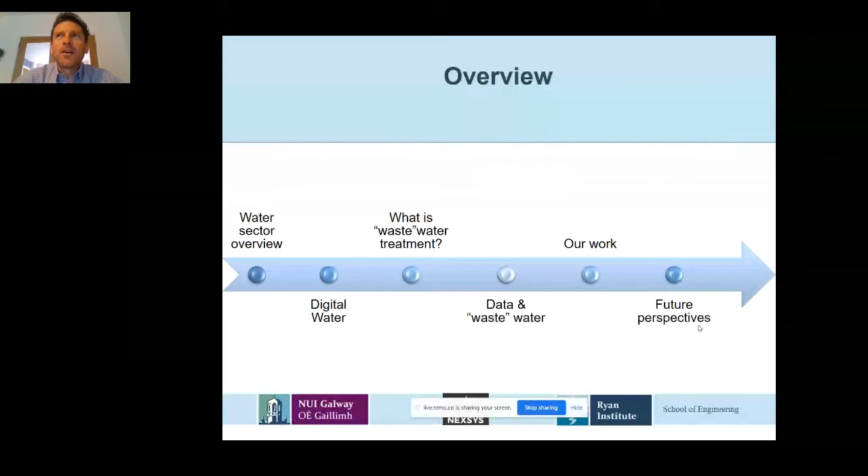I think there's a simple way of summarizing the role of the water sector: water, wastewater treatment, and sanitation. I've picked 3 graphs, and they list different types of infrastructure or services and their impact on life expectancy. One is the impact of health expenditure on life expectancy, and as you'd expect, in general there's a correlation—the more you spend on health, the longer your life expectancy in different countries, up to a certain point.

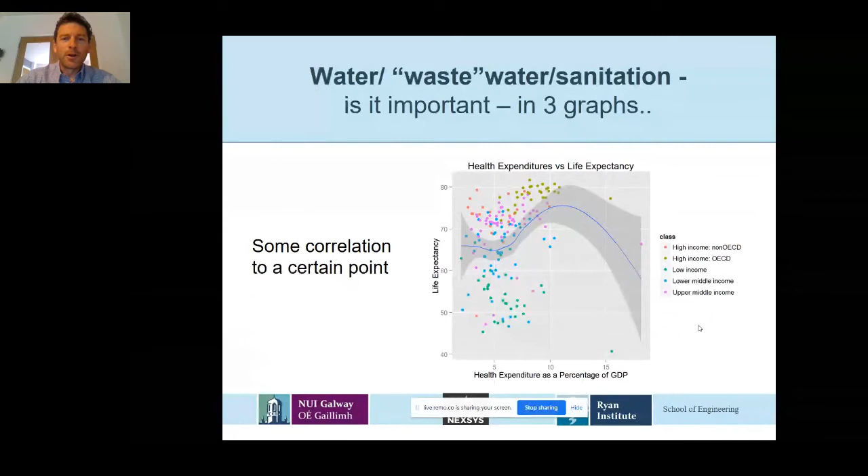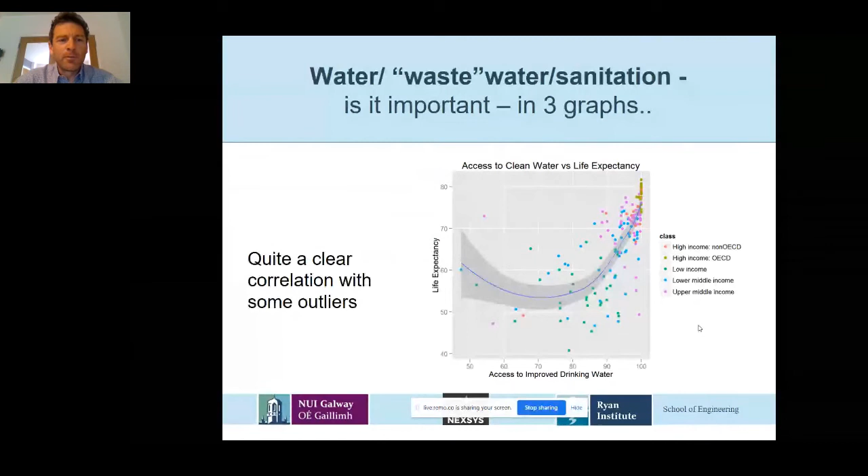If we look at access to clean water, we can again see there's a very clear correlation. Areas with access to improved drinking water supplies will have higher life expectancy for any given income. Again, you can see there is some scatter in that, but there is a clear trend. The final one is improved access to improved sanitation and life expectancy, and this shows maybe the strongest trend of all 3, and in many studies shows the strongest trend of any service, infrastructure, or factor you can measure in terms of life expectancy.

So what we're saying here is the thing that we maybe take for granted in Ireland, which is improved sanitation, is actually the single biggest impact in terms of life expectancy. I think that's a neat way of summarizing the importance of this sector.

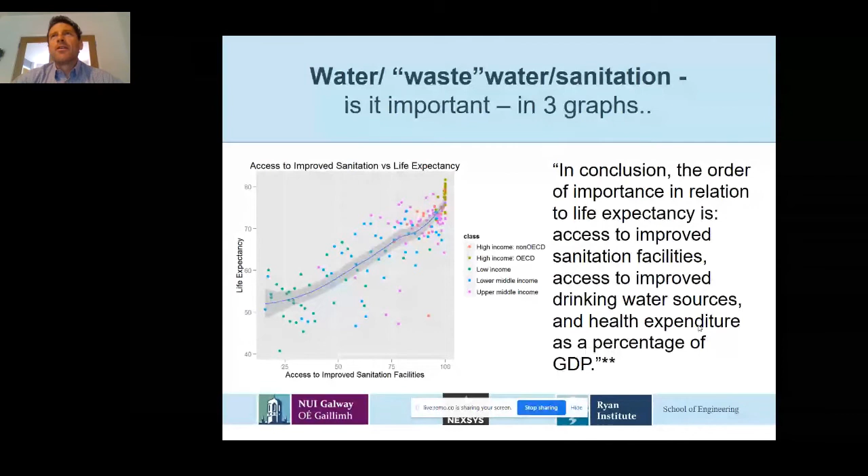So where are we now with the area of water and sanitation? Unfortunately, not to paint a bleak picture, but given the times we're in, it's unfortunate that still over 1.7 billion people have no access to a toilet of any type, and just under half the global population have no access to safely managed sanitation.

It's astonishing to think that more people have access to a mobile phone than safe sanitation. And when it comes to other areas such as schools, about a third of all global schools lack access to basic water and sanitation, which has a huge impact on countries' economic development and child development.

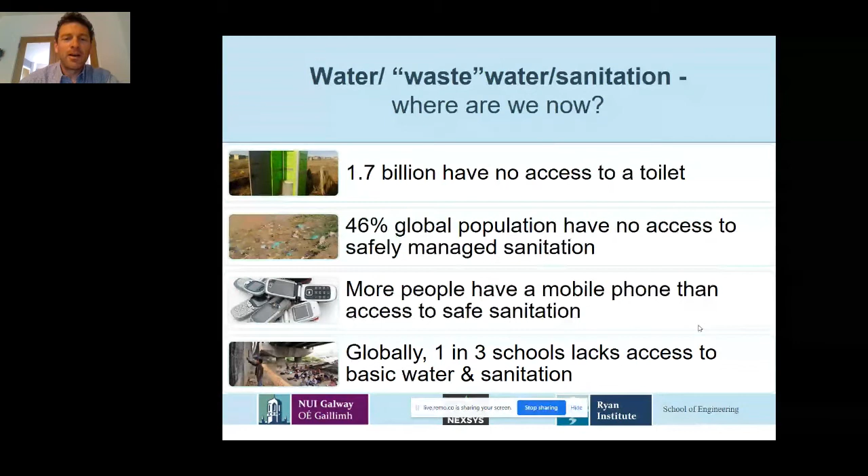So we have a long way to go in the area of wastewater treatment and water supply and sanitation. Not that we haven't done a lot.

Even in Ireland over the last number of years, on the top left-hand side there, you can see there has been a significant improvement in the number of areas complying with the urban wastewater treatment directives. Areas that have failed have reduced from just under 30 to maybe just above 10, and that trend is going downwards.

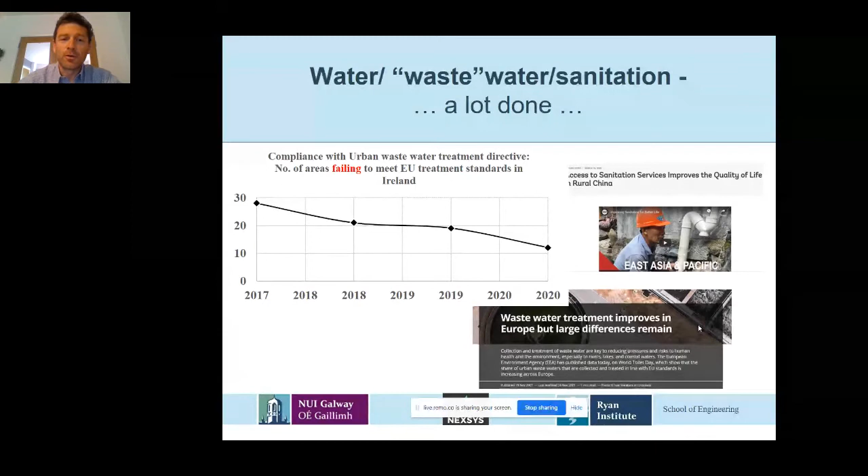And we see in various countries around the world, particularly in China, there has been enormous improvement in access to sanitation in rural China, which has made a huge impact on quality of life. Even across Europe, there has been very significant improvement driven by the EU in wastewater and water treatment, albeit there are differences between countries, particularly maybe in Eastern Europe versus Western Europe.

But there is a lot more to do, even in developed countries. In Ireland, we have scenarios where raw sewage overflows into various surface water bodies. This may be due to stormwater, sewage, and also due to the capacities of sewer systems and wastewater treatment plants, albeit there is a lot being done in this area.

We see across Europe historical legacy issues, particularly in urban areas, with regard to raw sewage entering rivers, streams and canals. And even in London, one of the biggest infrastructural projects in the world is ongoing at the moment to rebuild their Victorian infrastructure systems.

We can also see the impact in developed countries on drinking water supplies, where nitrate pollution stemming from human activities and wastewater that hasn't been fully treated enters into groundwater and makes that groundwater unfit to drink.

In terms of the wider impacts, what do these situations mean globally? Well, a child will die approximately every 2 minutes currently from a water-related disease. So by the end of this talk, about 30 children will have died from a water-related disease. And 160 million children will suffer from stunted growth and malnutrition due to water diseases, not due to lack of food, but due to water-related diseases.

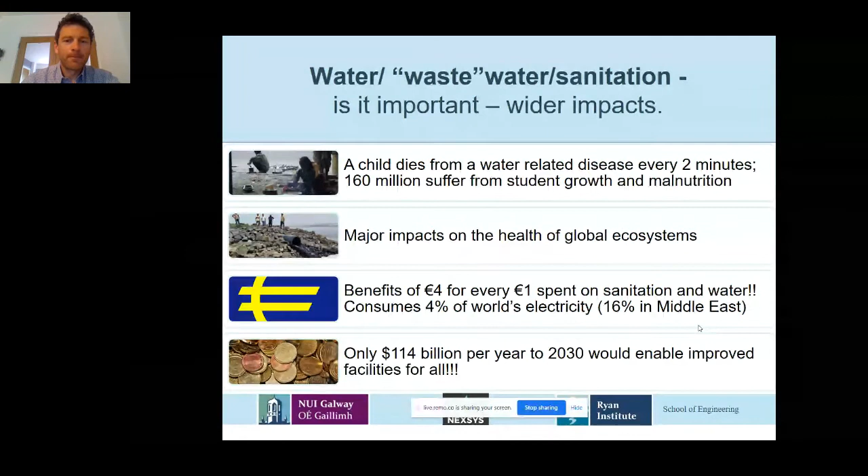So with that kind of background in mind and those higher level challenges, let's move on to this concept of digital water, which has been brewing in the water sector for quite a long time, but is now really beginning to impact the water sector significantly. A lot of that is driven by some of the aforementioned challenges, and some of them I will go through in the next few minutes.

So digital water is really looking at the entire water system, from sources and the environment through to collection, treatment and distribution of water, and also collection and treatment of wastewater, and the end users, and looking at how we can use data to improve all of those and the experience under each of those headings.

And it covers a lot of different things, from the implementation of SCADA and telemetry systems to hydraulic modeling of both water distribution networks, but also of entire river catchment basins. It looks at enterprise and IT systems, more efficient procurement, more efficient workflow management and maintenance, better capital planning. And on the consumer side, things like better billing systems, improved meter data management, consumer information systems.

And there's also a big push now for consumer engagement channels, so making people more aware of the water they use and how they can actually reduce their water consumption. And the International Water Association have produced a very detailed series of white papers on the area of digital water, which are very useful for anyone who would like to look at this further.

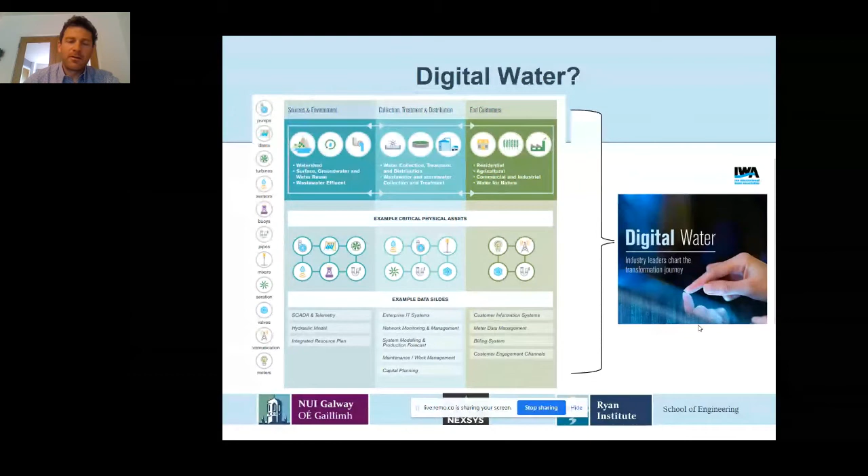Currently, in terms of digital water, across much of the world, many utilities and water supply companies are not even at the stage of thinking about digital water. As we can see, if over half the world don't even have access to sanitation, there's far greater problems to deal with first.

But then on the other side, those utilities that are more developed tend to be at the transactional or transitional stage of digital water. What we mean by that is that there tends to be weak or ad hoc links between different parts of organizations and different types of digital solutions. There isn't any connectivity between the different parts of the organizations, and also there isn't any holistic thinking between the environmental and source protection side and the water supply side, and also the relationships between the infrastructure contractors and the water utilities themselves in a digital sense.

In terms of transitional digital water, what we mean is where individual parts of a water and wastewater utility have taken it upon themselves to implement advanced digital systems, but that is not an overall utility priority. Perhaps in a certain area, someone has driven that kind of digital transition, but it's not ubiquitous across the organization.

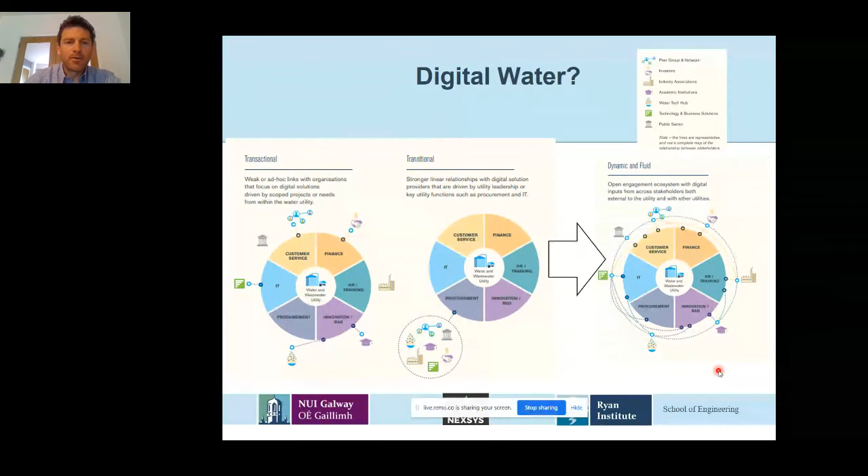So kind of breaking down the water sector a little bit, and after that maybe focusing on wastewater treatment, which is just one part of the water sector.

From my experience looking at how well digital water is implemented globally across different systems, I would say that water distribution and consumer interactions have, on a global basis, the deepest level of digital adoption, followed by water treatment, which is the water you drink when you turn on your tap. Then source protection, which is protecting both the outlets for wastewater, such as rivers, lakes, beaches, but also the sources, including groundwater for drinking water.

And unfortunately, at the bottom, I would say wastewater treatment is probably the area with the lowest level of digital adoption worldwide. Now, of course, that varies from country to country and from utility to utility, but as a broad heading, perhaps some of the reason for that is, I suspect, that it is also the most difficult area in which to implement this digital water. Some of that is down to the complexity of what happens in wastewater treatment plants, and there's also funding issues and other issues.

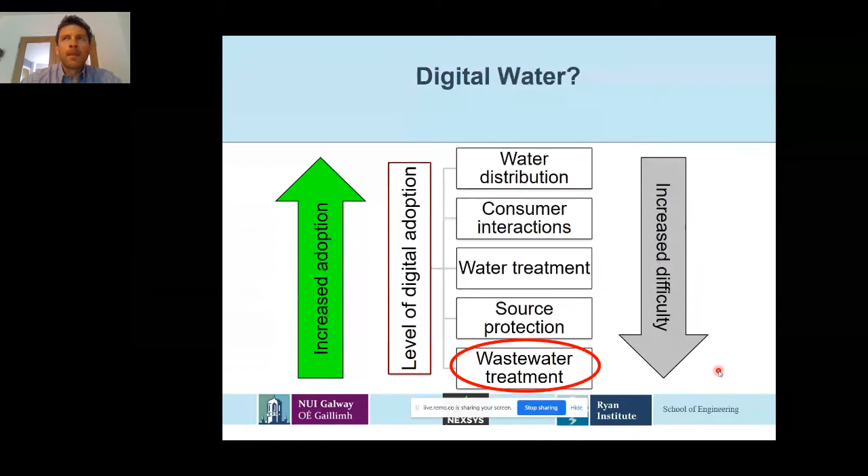The case for digital water across these sectors is pretty similar. I won't go into all the details under these headings, but really there are benefits at a community level, operational benefits for utilities and contractors who operate infrastructure, financial benefits, and importantly, long-term resilience benefits, which I think is a real driver for digital water into the future.

In terms of community benefits, there are clear benefits for health and environmental protection. Water utilities and contractors that are more digitally aware and have adopted digital water to a higher level also tend to best meet regulation for health and environmental protection, which is a key driving force for any utility in the water and wastewater sector. Similarly, for process excellence and optimization, that means reduced costs per unit of water and wastewater treated, and it also means limiting or eliminating missed regulatory compliance.

A huge area now is sustainability, and you'll see this in some of the work we are doing, which I'll present later. This is becoming a key driver for adoption of digital water, driven both by the need to report carbon emissions and the need to reduce chemical and energy expenditure. Leading on from that is operational expenditure as a key benefit.

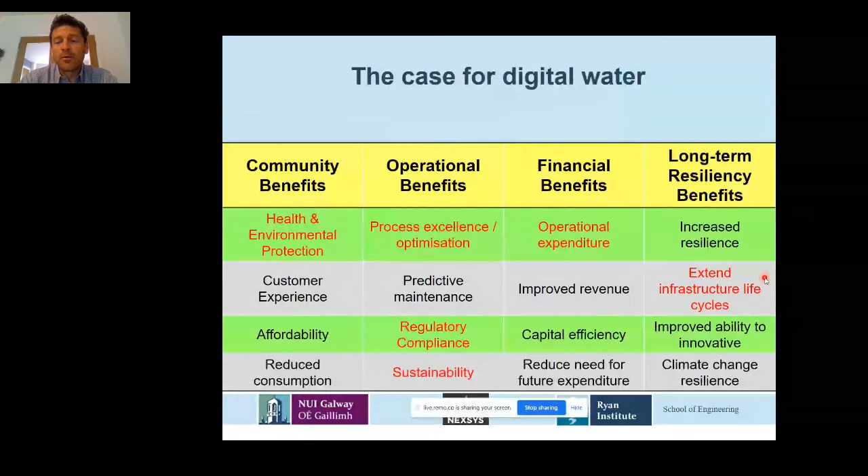With that broader level in mind, I'll move on to wastewater treatment. Some of you may be familiar with it, but wastewater treatment is the collection of wastewater - everything you flush down the toilet, or that comes from your sink, dishwasher, showers, industrial processes - and treating it to a level where it can be discharged into the environment safely.

To do that, we need a lot of energy, mainly electricity, and a lot of chemicals. It tends to be technology heavy, albeit that technology has been around for the last 100 years or more and hasn't changed very much, though we have made it more efficient. Funnily enough, the principal means of wastewater treatment haven't really changed substantially in about 100 years.

You also need a lot of infrastructure. You don't see much of this because it's below our streets and roads, and you only see it when roads have to be dug up to repair it. You also need people and a lot of money - it's costly infrastructure to install. On the other end, what we should get is clean water, or water that can be safely discharged.

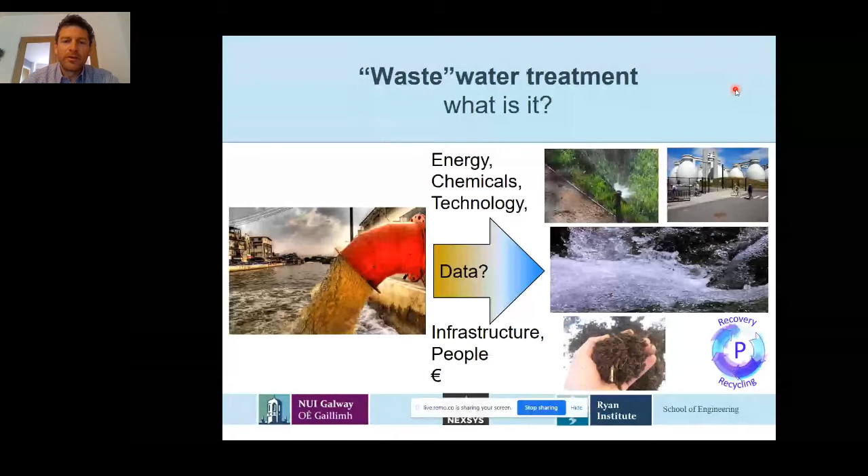For the wastewater treatment sector, before I go into data, some key challenges hitting that sector include climate change. An example in an Irish context is changes in rainfall patterns having direct impacts on how our sewers operate, because our sewers tend to be combined sewers collecting both wastewater and stormwater together. More or less stormwater can have negative impacts on the sewer system.

Regulation is only getting more stringent, and increasingly stringent regulation generally means an increased need to use more energy and resources. It also increases costs, as does the fact that we have both economic growth and demographic growth, which both lead to more use of water, which in turn leads to more generation of wastewater.

Then there are technological challenges which vary widely across the world. Many of these challenges, in countries with more advanced wastewater treatment systems, now focus on how we can actually see wastewater instead of as waste, but as a resource - which is why throughout the slides I have the word 'waste' in inverted commas, because the industry is moving in that direction.

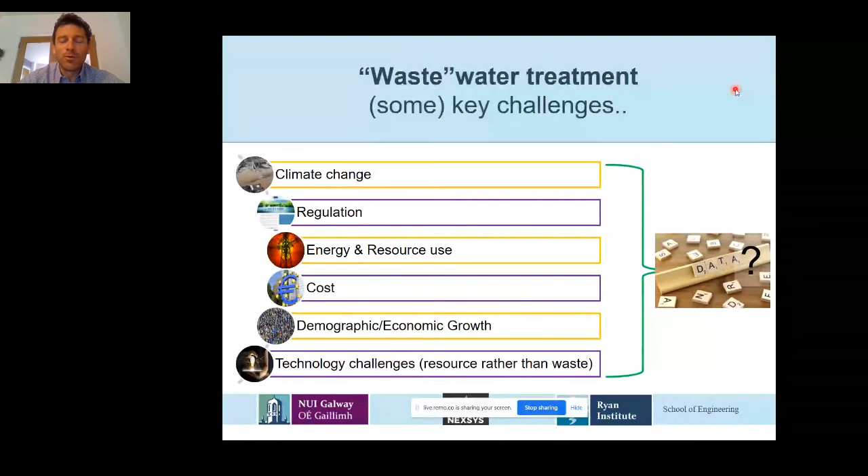So the type of data we can gather - we gather a lot of chemical data about the wastewater, what's its composition. We gather a lot of flow data in wastewater treatment plants: how much wastewater are we treating, where are we pumping it into the plant. We also gather characteristic data about what's called the sludge.

This is basically the bacteria, the biomass that we use to break down the wastewater. We gather data such as electricity data, and other data such as torque, RPM, and other data around the operation of mechanical equipment. That might be for operating pumps, for operating sludge treatment systems - sludge being one of the end products of wastewater - or operating motors for aerators, which supply oxygen into our tanks and help us treat the wastewater.

So there are lots of different types of data we gather, collected in lots of different ways, from inline and automated sensors to human-heavy laboratory systems.

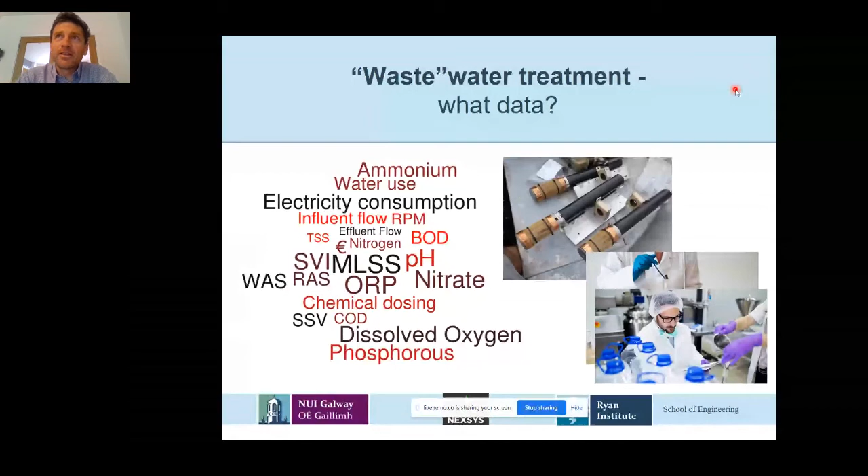The data itself tends, like in many engineered systems, to be at different time levels. For example, we have data collected on a weekly or monthly basis, which might be for regulatory reporting, purchasing data, and some operator measurements collected on site. Then you have daily data, which might be for larger plants, lab-based analysis, looking at the performance of the treatment plant on a daily basis.

There's also data collected by inline sensors but only logged at a daily level - that particularly happens with flow. And we have other measurements, such as those indicating the health of the sludge or the bacteria operating in our system. Finally, we have data collected in periods of seconds or minutes, from inline sensors, flow and energy meters.

Many of those inline sensors tell us, for example, the chemical or physical parameters of the wastewater, which give an indication of how well it's treated. So there's a lot of different timescales, collected in a lot of different ways, and it can be tricky to merge this together into a package that will improve control of your system.

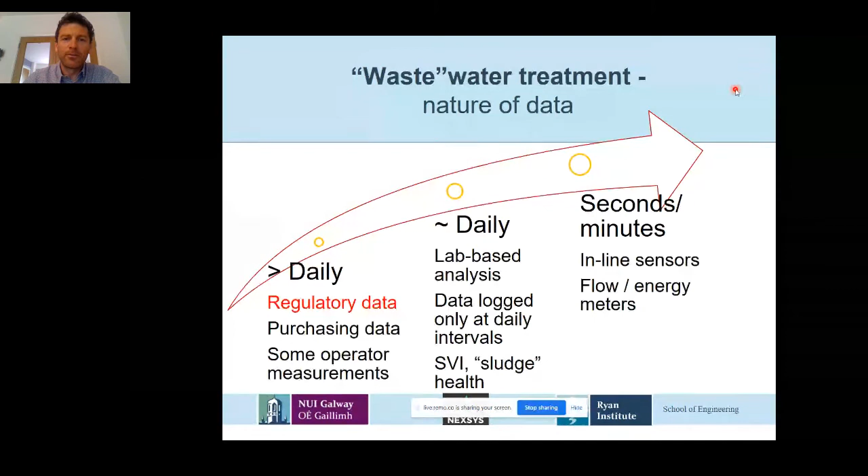And what can we do with the data? Well, I've mentioned before, we can use it for regulatory compliance. This is the key need, the key outlet for data. Above all, wastewater and water utilities must meet regulatory compliance, and this trumps all other issues, protecting public health.

We can use it to measure whether we're meeting climate targets or not. We can use it for infrastructure resilience - can we use existing wastewater treatment plants to treat more wastewater while maintaining regulatory compliance? In other words, can we make them more efficient, reduce the need for upgrades, and also model how we can adapt existing infrastructure to changing scenarios? So in the future, if we have more dry periods and more periods of heavy rainfall, can we operate our infrastructure in a way that adapts to those scenarios?

Within processes themselves, we can use it to reduce energy consumption - I'll give examples of this later - chemical consumption, and also for fault detection in equipment, which becomes very important because it can help prevent discharges of untreated wastewater into the environment, and also equipment breakdown.

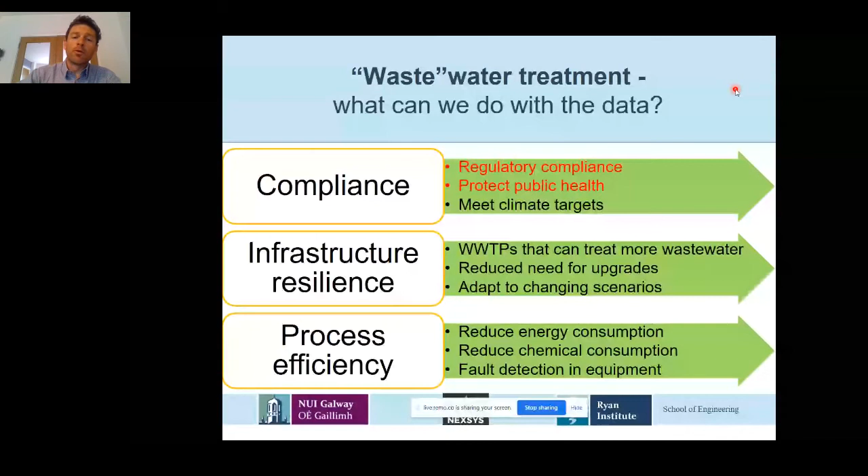So the type of tools we use - our group works across all three areas. My own specific expertise, although I have research occurring at all levels, is in the white box area. These are what we call deterministic equations that require physical knowledge of the system and allow us to model the individual biological and chemical processes happening in wastewater treatment plants. The advantage of these is that they have a lot of explanatory power, which can help with improved system design, upgrading of systems, and scenario modeling.

They can be very useful for training, but as of yet, their use for real-time process control and simulation is not really at a commercial level, because they're computationally heavy and take an enormous amount of engineering expertise to properly calibrate and validate these models.

We then have grey box models, which are a combination of these white box models - physical models of the system - and data-based models. They have some use in system design, and they can also be used for real-time process control.

They are very useful for fault detection and diagnosis, and they can have some explanatory power. In other words, they can explain some of the reasoning behind what is going on in processes, but that is somewhat limited. And then we have black box models, which many of you may be familiar with.

These are data-heavy models that use advanced statistical methods, neural networks, genetic algorithms, and various other methods to mainly operate real-time control or predictive processes. They are used for fault detection and diagnosis, but they have limited explanatory power. So these are the main tools that we leverage.

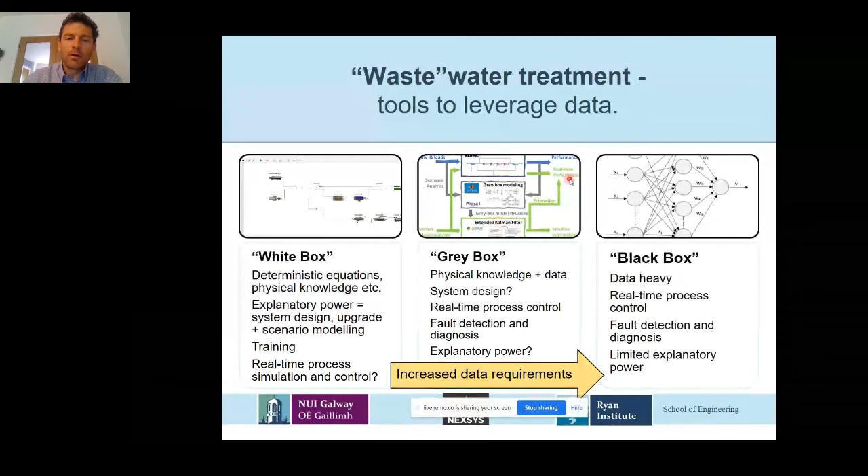And just where are we now in terms of those tools in the wastewater and water sector? Well, there has been really in the last number of years an enormous amount of publications in this area. For example, some of these would look at the use of genetic algorithms for controlling wastewater treatment plants.

Others would use prediction models for control or for predicting in real time what your discharged wastewater from the treatment plant will look like. And therefore, if you can predict that and predict there will be a problem, you can maybe shut down the discharge, or change your treatment process such that your discharged wastewater meets compliance.

There's also a lot of work on the use of wastewater treatment plants in terms of demand response. So being able to operate wastewater treatment plants in periods where there's surplus electricity—wastewater treatment plants being large electricity users, but they also have to pay for their electricity. So perhaps they can be operated at times during the day where there is surplus electricity, which would save them a lot of money and be useful for the electricity operators.

And there has been some very interesting work recently on the regulatory implications of data engineering and real-time control in the environmental, water and wastewater treatment sector. An interesting question I've been thinking of, based on some of these papers, is when is too much—the balance between too much information and not enough.

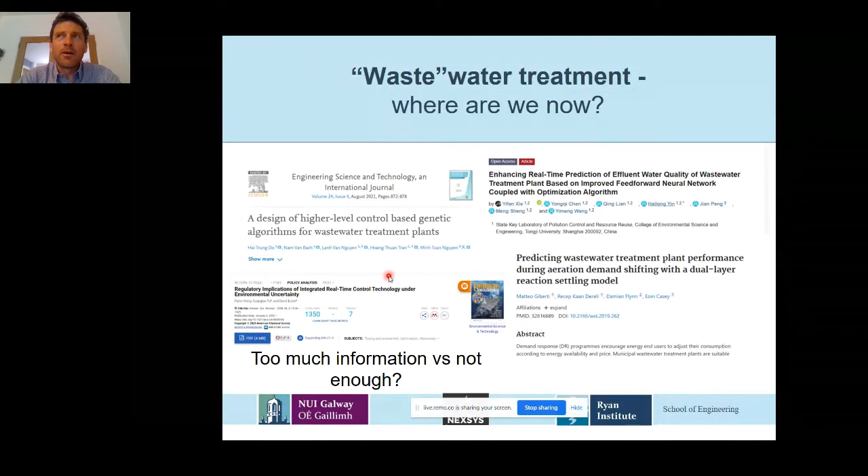The unfortunate thing is there have been relatively few scaled examples to date. There have been a lot of papers since the 1990s where the whole issue of real-time control of wastewater treatment plants came up, but since then there still are not a large number of large-scale applications of real-time control mechanisms across the world. I have some examples here where it has been demonstrated for larger wastewater treatment plants that there can be significant decreases in things like chemical usage and energy usage per unit wastewater treatment while maintaining compliance.

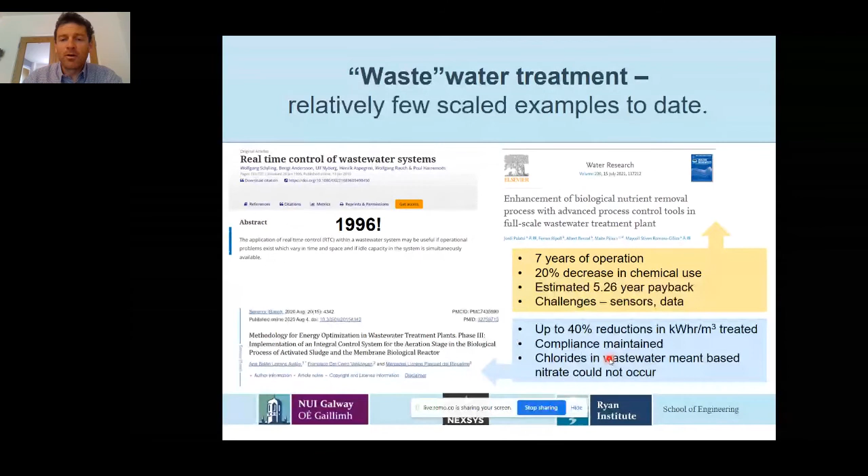But there are also a lot of challenges with sensors and with data. The payback for some of these systems can be over 5 years, as in this case, and that can be considered too long for the industry. Also, there are chemical issues in the wastewater, which means the application of real-time and inline instrumentation in that sector is quite difficult. So leading on from that, what are some of the problems we have when it comes to data engineering in the wastewater treatment sector?

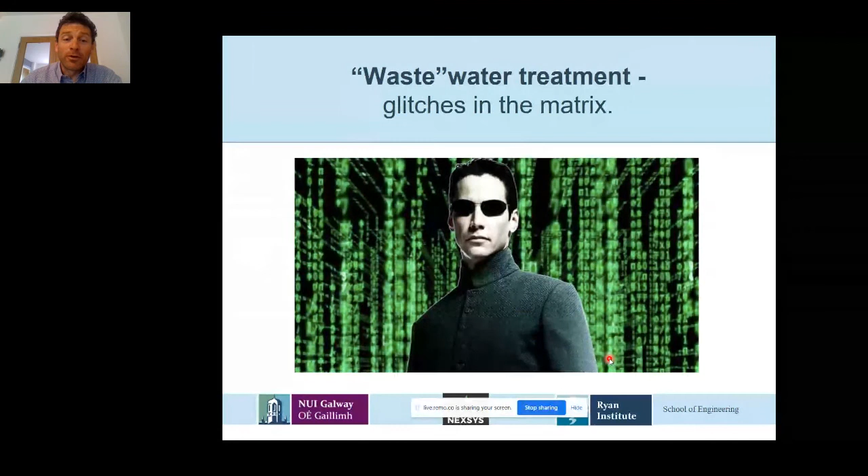I'd say the primary one, in a way, is maybe a little disconnect between the data sector and the wastewater engineering sector. So often there's a disconnect between what they think we need and what we actually need—or it could be said the other way, that perhaps we're not communicating properly, or we don't yet know exactly what we need. I think that is one of the primary difficulties that has to be overcome.

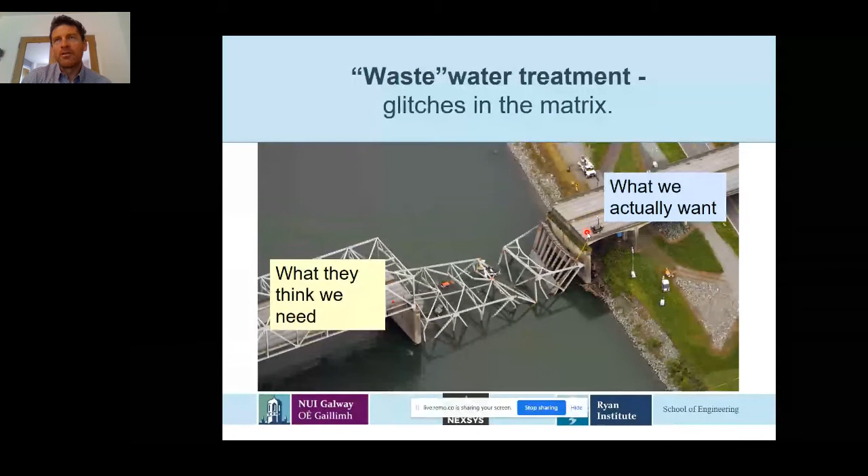From the wastewater sector, they would say there's a lot of packages and applications offered that can generate a lot of data, but nobody really knows what to do with all this data. I think this is really one of the key chasms that has to be bridged in order to roll out this concept of digital water in the wastewater treatment sector. Other issues we've come across in operating treatment plants, and that I know from talking to industry are seen as major problems, would be things like missing data.

Data transfer can be a major issue, particularly from decentralized wastewater treatment plants. There is as yet no real generalized application framework. So a lot of the work, including a lot of our work, is done on a plant-by-plant basis, but it's hard to generalize that across the sector.

Capital and maintenance costs for implementing digital water, things like reliability and complexity of maintenance of these systems. And then there are the very complex relationships between what we actually measure and what we want to know. The relationships aren't very nice. There's a lot of interfering factors in these, and we are essentially trying in some way to model a lot of biological reactions, which is difficult to do.

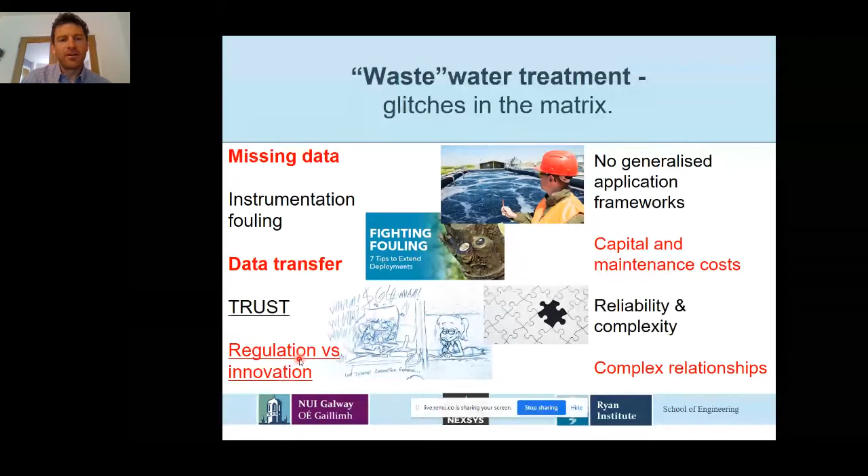Finally, I'd say the issue of regulation versus innovation, whereby in a sector that is very heavily regulated, does that have an impact on its ability to innovate? I'd also say that maybe we need to think a little bit more about existing tools and how we can use those most effectively, simple things like Excel or indeed our own knowledge as well. And that we need to maybe integrate those into our wastewater treatment plants better.

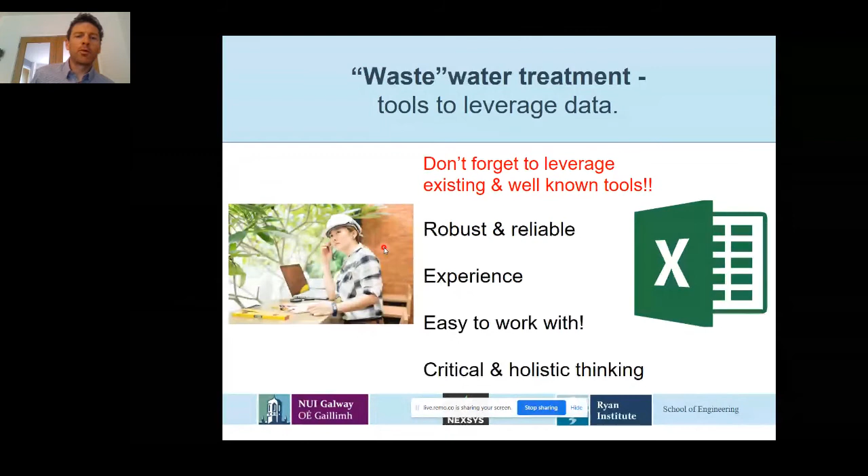So some of our work to maybe address this at NUI Galway, I'm just going to go through some of our work to try and show you how we're trying to address some of these challenges. And a lot of this work, in fact all of it, would have been conducted with industry or in collaboration with Irish Water, for example.

For example, the issue over trusting instrumentation, one of the ways we've tried to solve that is develop image-based sensors, whereby the sensor itself takes certain measurements, but it also takes an image in various ways of what it's actually trying to measure, so that even if you don't trust the data that's coming back from the sensor, you can actually look at an image of it. And in this sector, often seeing is believing. It's very easy to tell the difference between untreated wastewater and treated wastewater in most circumstances.

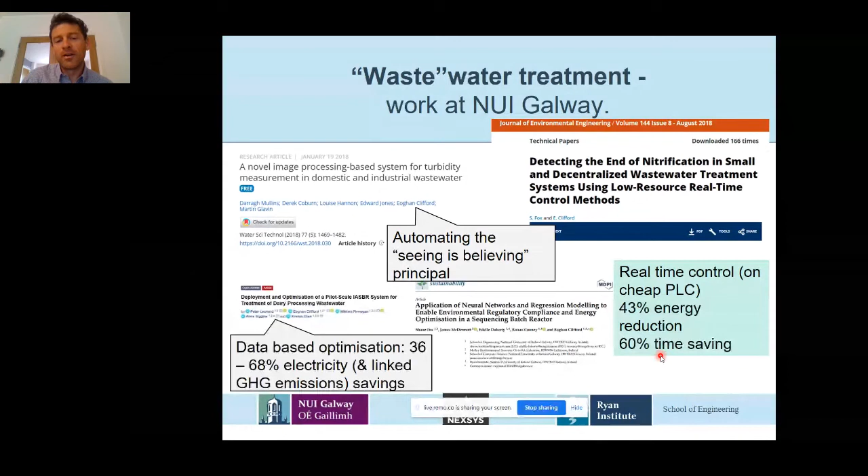We have managed to implement real-time control in very small treatment plants using very cheap PLCs, which has been seen as a major challenge, and we have managed to implement those and show significant energy reduction, cost and time savings. Maybe an issue that still has to be overcome is when those are remotely located, the sensors we use to drive these systems do tend to get fouled and clogged.

In other areas, what we've tried to look at is how we can actually reduce the amount of data that we generate and the amount of metering that we need and still effectively control a water system. In this case, we are looking at water distribution systems, but it can be effectively applied in the wastewater treatment sector.

A major issue for the sector, and indeed a lot of engineering sectors, we've seen this with companies where they just simply ignore their online SCADA systems, particularly any false alarms that come from those systems, because they get so many false alarms. We have visited companies where they simply switch them off and the operator just detects faults themselves by eye, for example, or just by seeing that the process is working, so assumes everything is okay. This is a major issue we're trying to address as well.

Also in the area of adaptive false alarm systems, so systems that can train themselves and become, I suppose, more accurate over time, and can also adapt if the treatment plant itself needs to adapt. These will be more targeted at things like pumps and motors and mechanical equipment in treatment plants.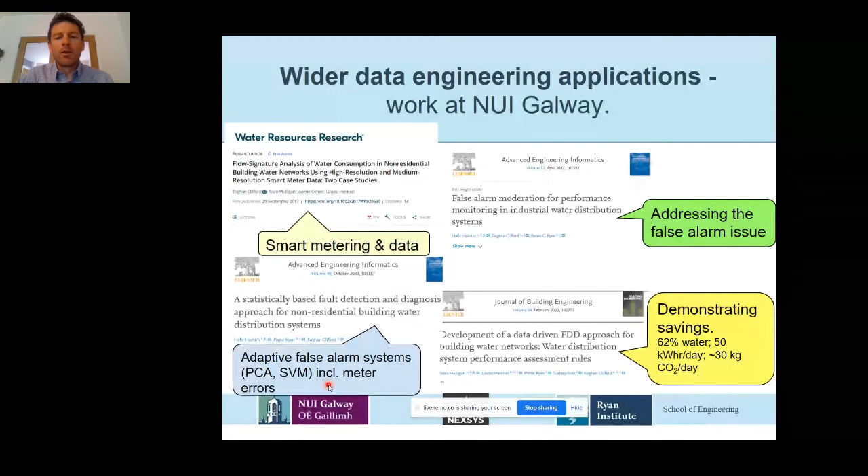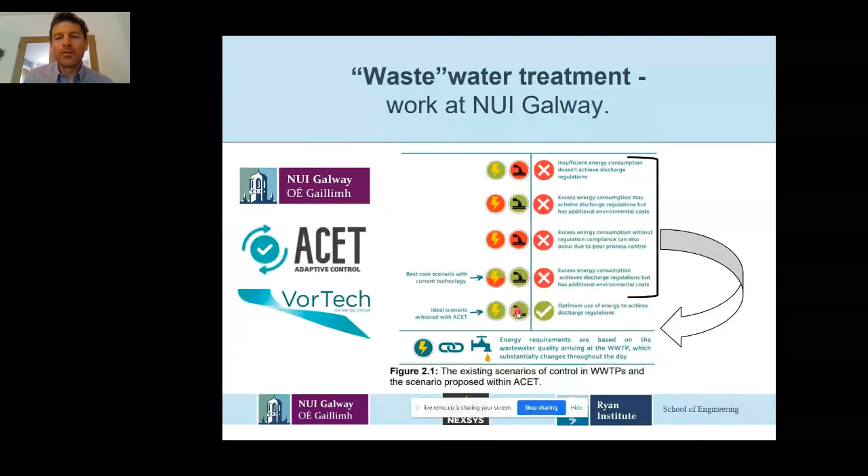So I'm going to do a little story from some of our recent work: the development of a spin-out company from NUI Galway. For a minute, I'll put on my hat as one of the founders of this spin-out company, which came out of NUI Galway as a result of both data engineering concepts and technology development we've been working on there. One of the key things about this technology, developed for the wastewater treatment sector, is that it was developed with data in mind.

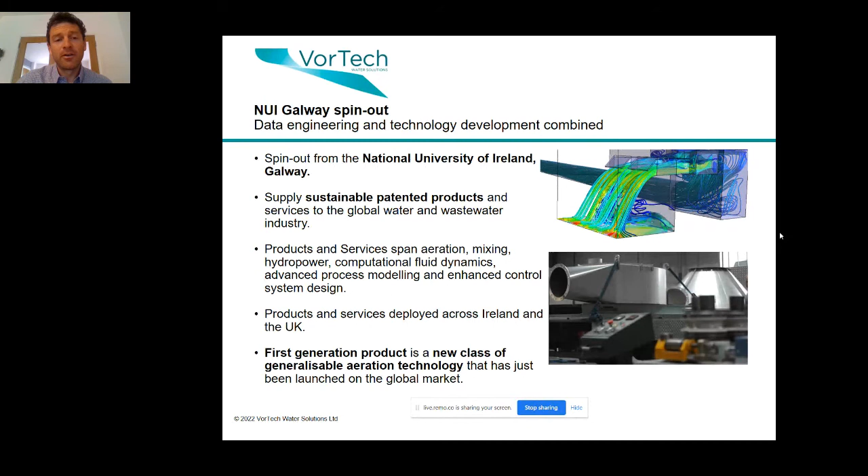In other words, it was developed so that it can leverage data that wastewater treatment plants generate. We're looking at different types of control packages for wastewater treatment plants that leverage their existing capacity and take account of the fact that the plants themselves may not have the capacity to be upgraded. So we try to leverage what data they have or minimize the level of upgrade needed to make them efficient.

One example we've recently been working on in the UK is an industrial wastewater treatment plant build where we've installed the core technology of that spin-out company. Associated with this, we've installed a real-time control philosophy for this system, taking data from different parts of the plant and using it to run and control our technology within the plant.

This is the primary energy user within this wastewater treatment plant, and since we installed our system, there has been a 30% reduction in electricity use, and significant savings in the need for the company to purchase chemicals. In a recent report we produced for the company, we estimated these savings as equivalent to about 93,400 kilos of carbon dioxide savings every year.

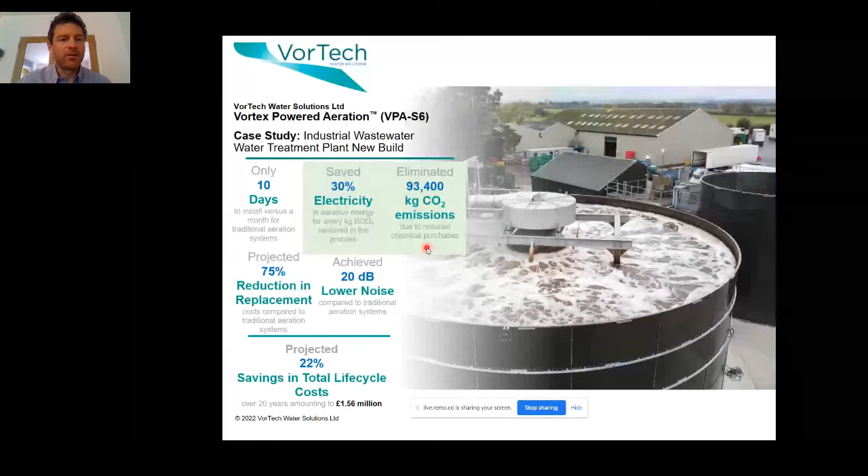I've highlighted that because the company themselves were much more interested in this aspect, believe it or not, than the actual monetary savings, which were still substantial, because they are under pressure to meet their climate targets and are looking at ways to reduce their energy and chemical usage. Any technology that enables a system to be optimized and run efficiently is something industry is really looking for. Okay, so putting back on my NUI Galway hat as well.

Some future perspectives: the market for control and automation in the water sector is 30 billion, but this is expected to grow by 6 to maybe 12% per year, depending on the reports you use. Some of the recent work we've seen coming out is from Copenhagen, and it won't surprise a lot of people to know that Denmark leads the way in this area.

Their key driver now for innovation in wastewater treatment plants is sustainability. For example, Copenhagen aims to be carbon neutral by 2030, so their entire water and wastewater sector must be carbon neutral by that stage. There has also been a drive to link the power that can be generated in wastewater treatment plants, using byproducts to power other aspects of the city's utilities. This is also an example from a Danish city.

The key drivers for the digitalization of the water sector are particularly things like energy costs, the need for climate neutral utilities, and also the regulation of emerging pollutants, things like hormones and pharmaceutical products, which are currently regulated to a certain extent, but will be more heavily regulated in the future.

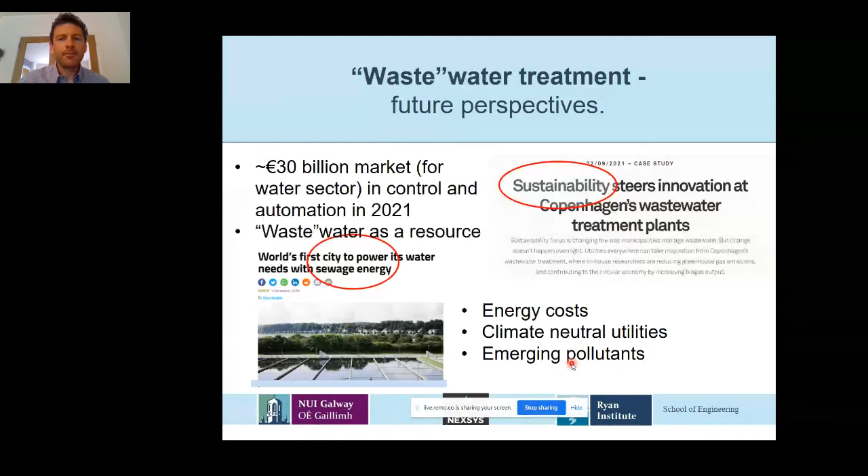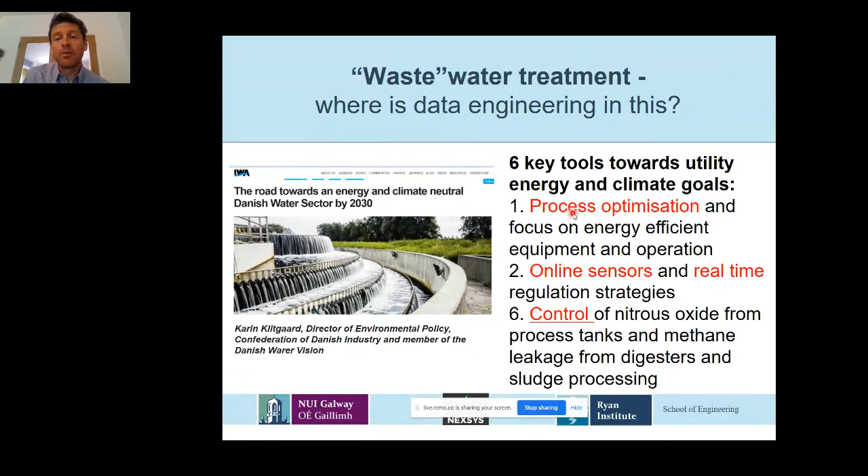The International Water Association looked at 6 key tools needed to drive the water sector towards energy and climate neutrality. I've picked out 3 of these because they rely on data engineering: process optimization, driven by data engineering; the use of online sensors and real-time regulation strategies, again driven by data engineering; and control of nitrous oxide emissions from process tanks. The minute you see the word 'control,' you are looking at data engineering here as well.

So these are 3 of the 6 key areas that they see as being necessary for utilities' energy and climate goals, and these will heavily require or rely on data.

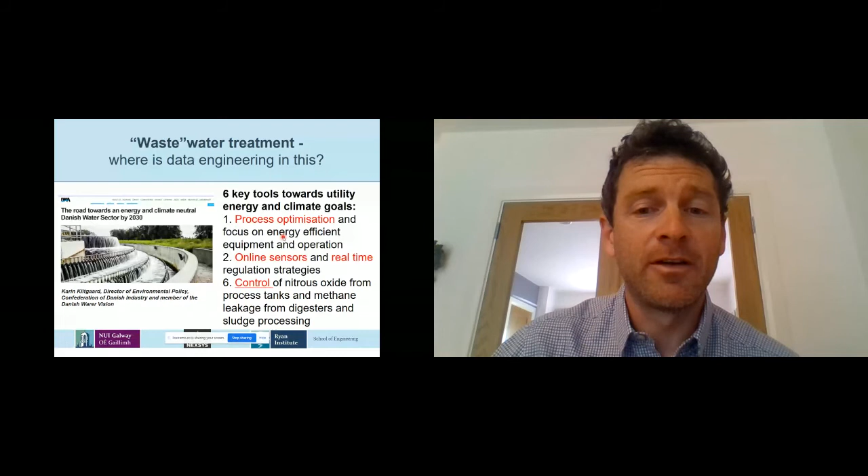Just to finish up the last couple of slides, I suppose the ultimate goal for the water sector, going back to the International Water Association whose recent white papers have been very well developed and insightful, is to look at what they're calling a water-wise sector. That's a sector that holistically, instead of trying to do these things separately, looks at protecting and restoring ecosystems, because that protection and restoration is heavily reliant on the water sector, water utilities, and water infrastructure providers, as well as protecting and restoring water resources.

These are the resources that we abstract and use for industry, for potable water, etc. Then there's water sensitive design. We often design things in industry and even in our own homes to be energy efficient, but we rarely design things to be water efficient. That goes from the materials we use in industry to the actual amount of water we need in our industrial processes.

And then there's this idea of water-wise cities and communities, enabling communities and cities to be in control of their own water resources and to use them as effectively and efficiently as possible. You would like that eventually cities and communities will be completely self-sufficient in terms of water resources and the resources needed to treat and protect them.

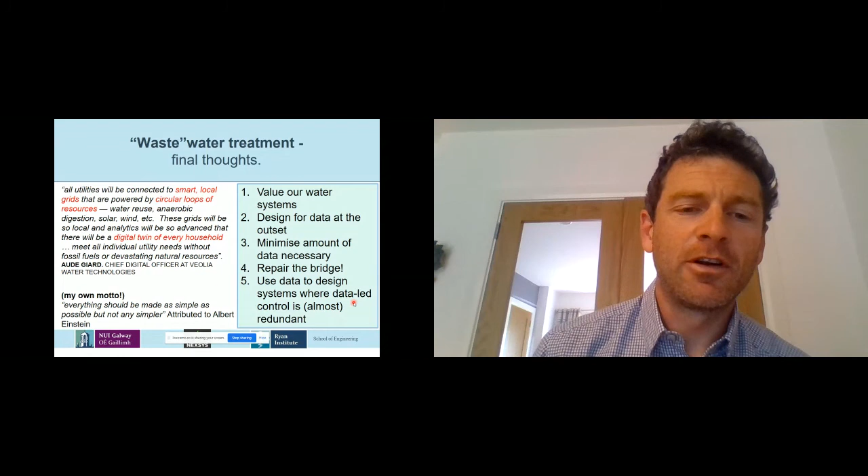Thanks very much indeed, Owen. It's a fascinating insight into the challenges, but also the possibilities that exist and the initiatives underway in the wastewater sector. Probably something that, as you said, we in this country take for granted and don't fully appreciate the built infrastructure and how it works, and the challenges that built infrastructure is facing now and into the future.